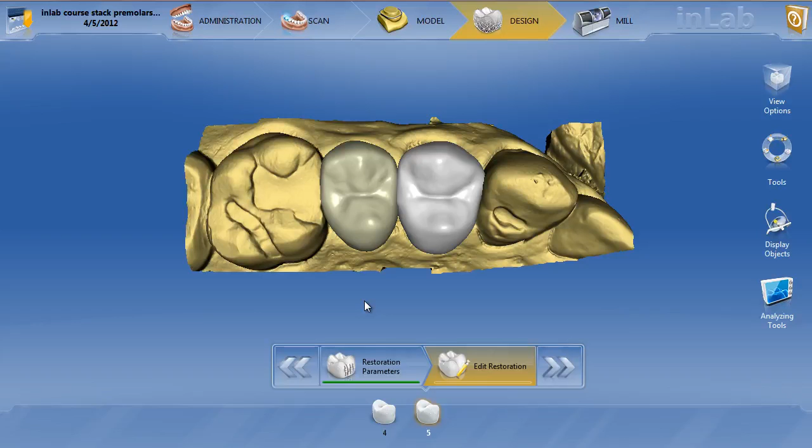Okay, in this video we're going to discuss general sprue position in the mill phase of the inLab 4.0 software. I'm going to go through a couple different scenarios - a full crown, a veneer, an inlay, onlay, and a bridge - so you can see the differences and how you control the sprue.

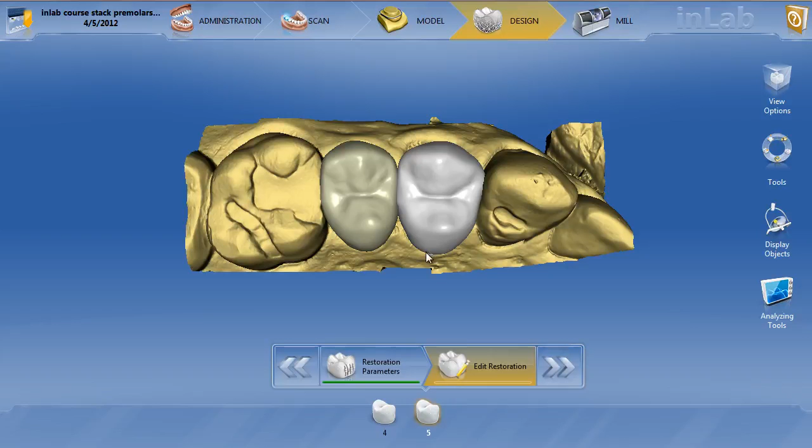So here you can see we've got tooth number 4 and tooth number 5, full contour restorations. Let's go ahead and bring tooth number 5 to the mill phase. You can see we're using a Vita TriLuxe block here. We went through the actual dock bar icons in a different video.

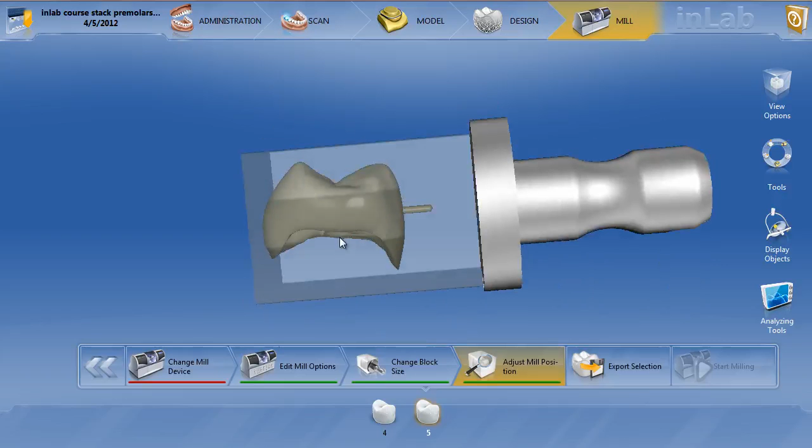So let's just go ahead and show you how to do the sprue. This is exactly similar to how you would do it in CEREC 4.0. We can right click on sprue, or click tools, click on sprue, and you're going to get the little circular area that you can drag the restoration around to move the sprue. If you've been using 4.0, it's exactly the same, so there should be no confusion with that.

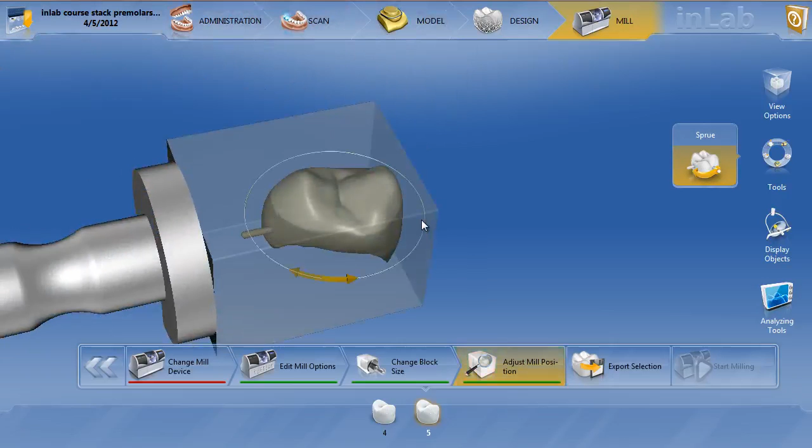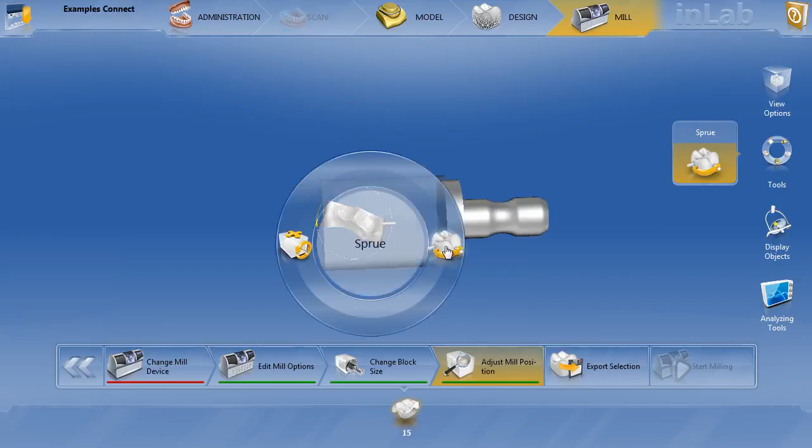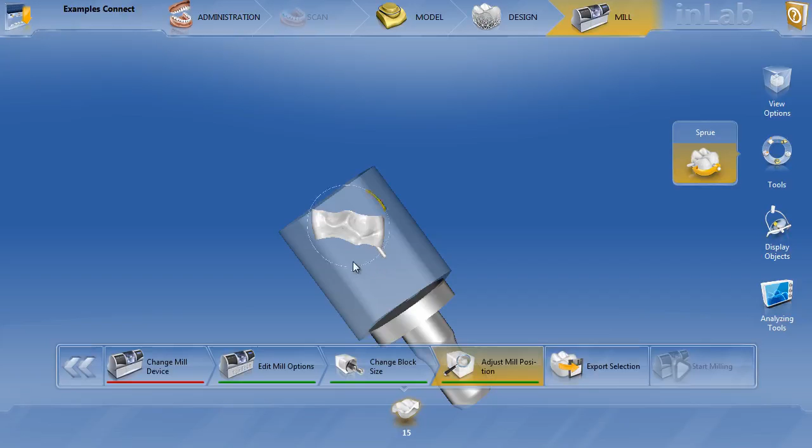Okay, so now let's go on to do an inlay and onlay. Here's an inlay and onlay in tooth number 15, and it's exactly the same as the crown. If we go ahead and hit sprue, we have the little circular area that we can drag around to get the sprue. You even have the ability to put the sprue actually right in the intaglio if you'd like, just like that. So you do have that possibility with inlays and onlays - you still can hit sprue and move it circularly.

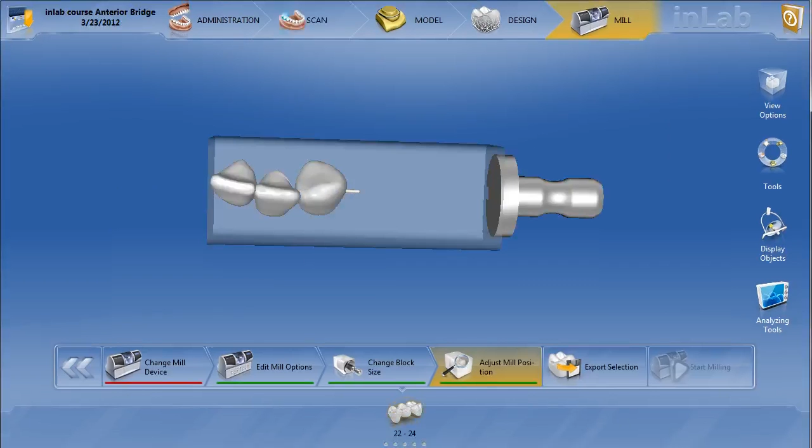Now the differences are going to come about with the other two common restorations, which are bridges and veneers. Let's start with the bridges. Here is an anterior bridge from tooth number 22 to 24. This was just done in e.max, and now if we click the sprue, you're going to notice that we don't have the ability to actually rotate that with a little circle. The reason's pretty clear - we don't have the width of the block to do that.

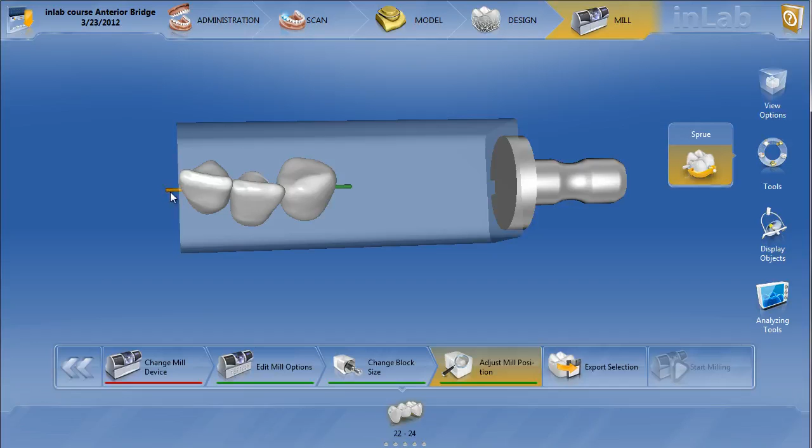So you've got two different choices - either the green, which is the one the software actually recommends, or you could go to the other side, which in this case is going to be the mesial. If I put my cursor over, you can see that turns it orange. Just click on that, and it'll switch it around to the other side. So whenever you're doing bridges, whether it's full contour or multi-layer or anything like that, you're only going to have two options to move the sprue, which is the mesial or the distal.

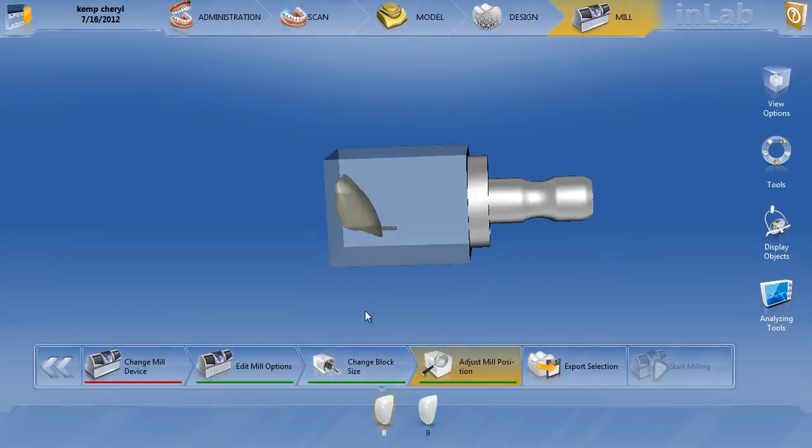Okay, so lastly, let's go quickly through veneers. Here is a veneer in tooth number 8. You can see it's in a Vita TriLuxe block. Now with veneers, it's a little bit different - you have to really watch the multi-layer to make sure you get it in the right layer. You don't want the transparent to be down at the cervical and vice versa.

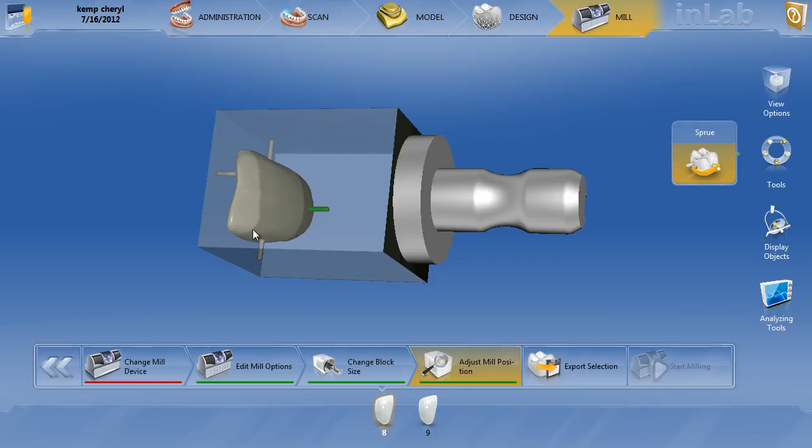So if I go ahead and hit on sprue with a veneer, now it gives me the same type of options as the bridge. I can't rotate it around, but I've got 4 different areas where I can place the sprue. I could go on the mesial, I could go on the lingual, or the distal, and move the sprue around that way.

Now again, where the software recommends it is going to show in green, which is obviously probably the best part of this scenario, which would be the facial surface. So that's how a veneer works.

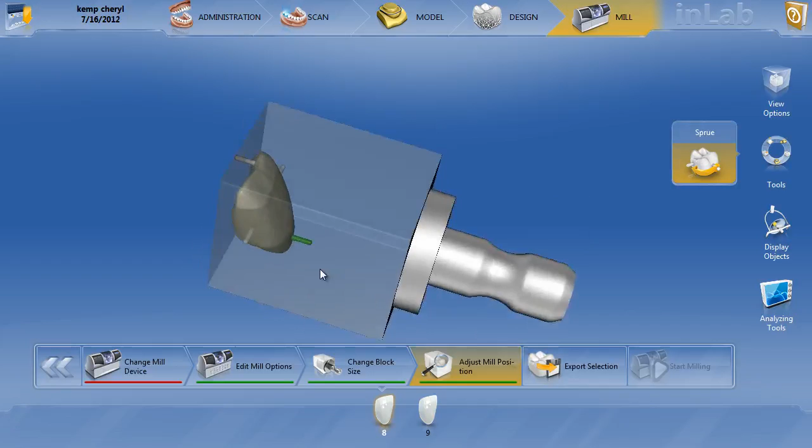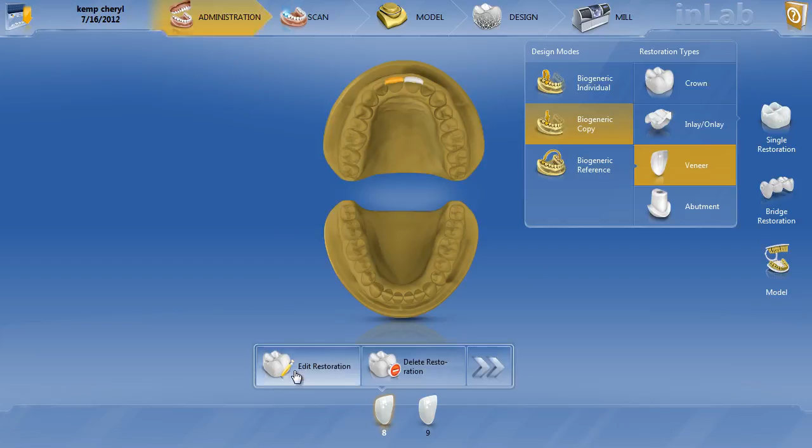Now if you get into some issues with a veneer, and none of these are ideal, which can happen in some circumstances, real thin veneers for instance, if you really want to do it, you can go back to administration. We can go ahead and edit tooth number 8, click on crown, biogeneric copy, tooth number 8, click OK. Now when we do that, when we change the actual designation, we're going to have to go back to the model phase and redesign it.

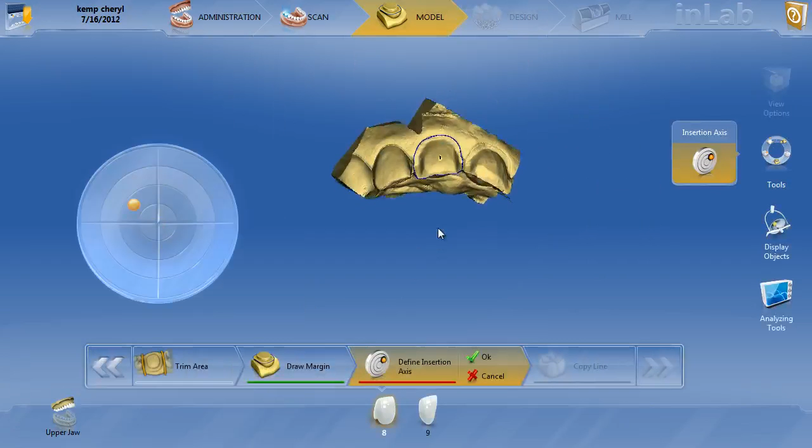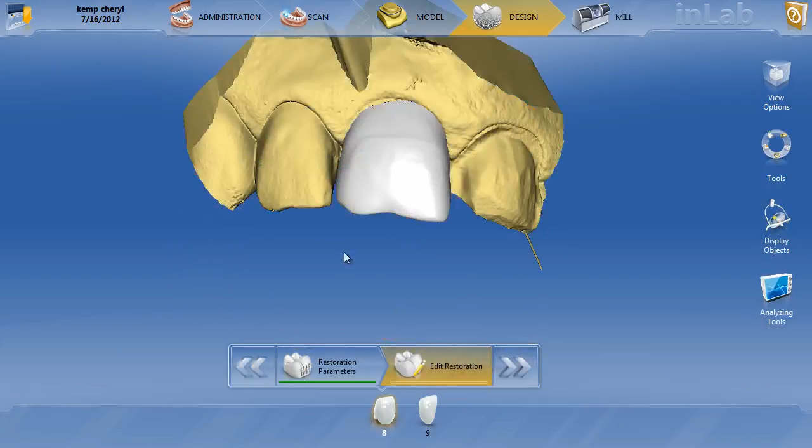So we'll go ahead and set that insertion - we'll do it really quickly here. It's going to actually keep our margin. We'll do our insertion axis, redo the copy line - again we're just going to go through this fairly quickly - and get our proposal. Okay, so there's our initial proposal. So again, you can get pretty good proposals in crown mode as well.

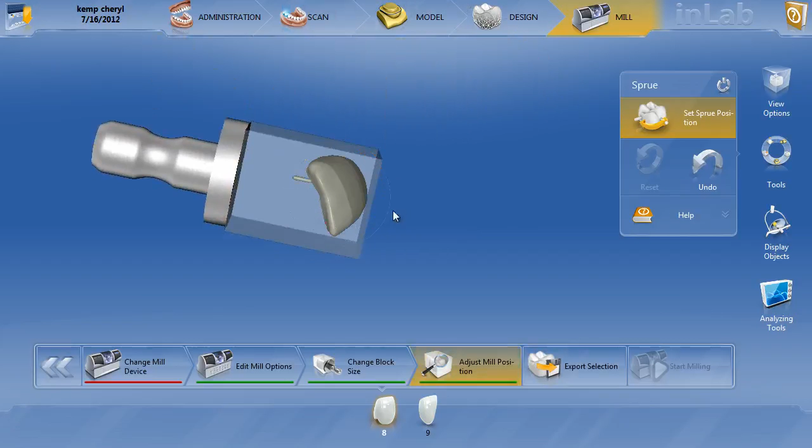We'll move it to the mill phase, and now you'll have the ability to go ahead and rotate that around on all axes because it's not in veneer mode, it's in crown mode. So when I hit the sprue, we'll be able to actually move this around wherever we want to do it, even if you want it on the lingual like that.

Okay, so that's how you can control the sprues. We didn't go through some of the other ones like telescope and things like that, but maybe in other videos, or you can figure those out on your own. Just the most common ones, which would be veneer, inlay, onlay, crown, and bridges.